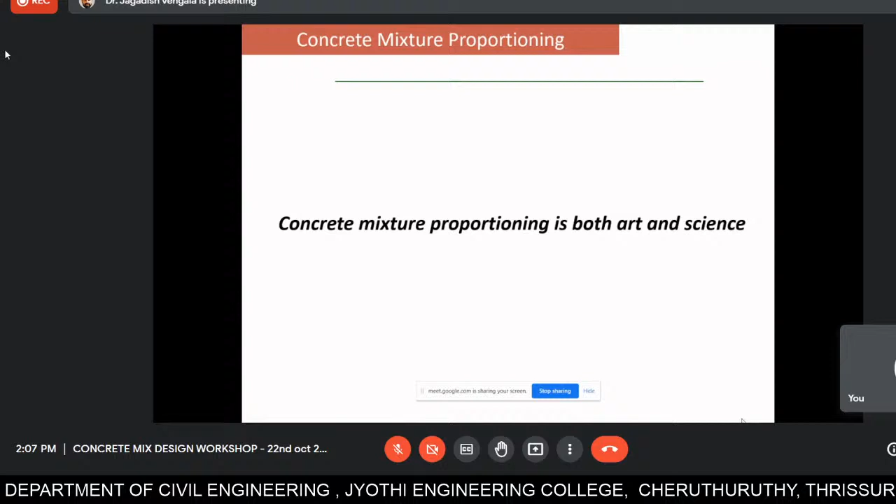So when you talk about concrete mix design or mix proportioning, it is both art and science. Why I'm saying this? Because you are mixing different constituents, and the properties of these materials, whatever you are mixing, whether you take cement, coarse aggregate, fine aggregate, water, or any other admixture, whether it is chemical or mineral, each material has a different property. So to mix them and make them into one strong construction material requires you to know a little bit of science, and it is also a kind of art.

So before getting into the topic, why is mix design required for normal concrete? Because many times we might have seen in our places, particularly in small residential buildings... I want you to see this particular video.

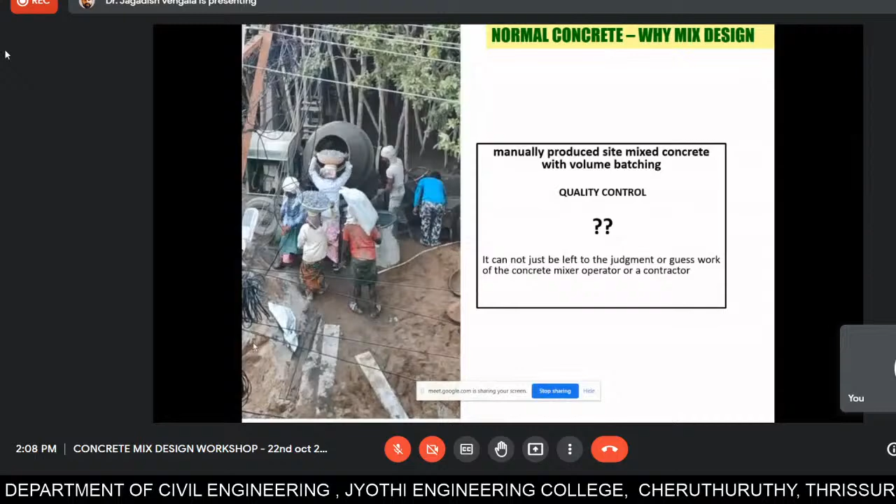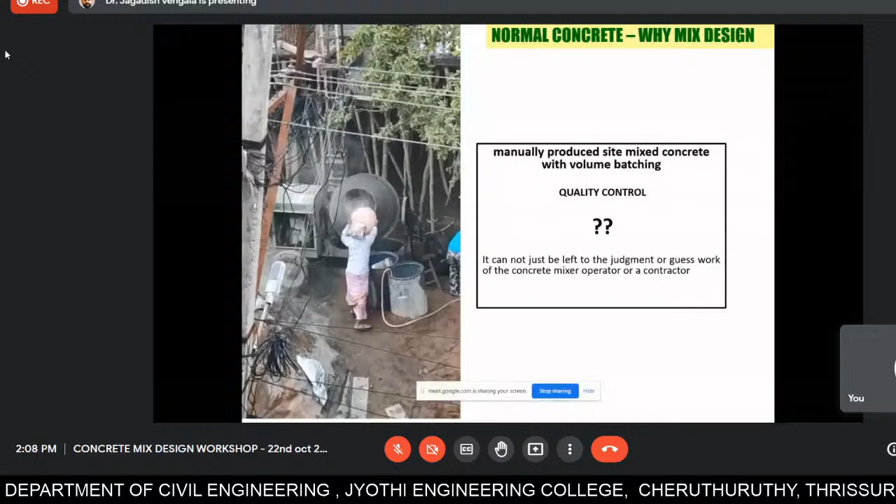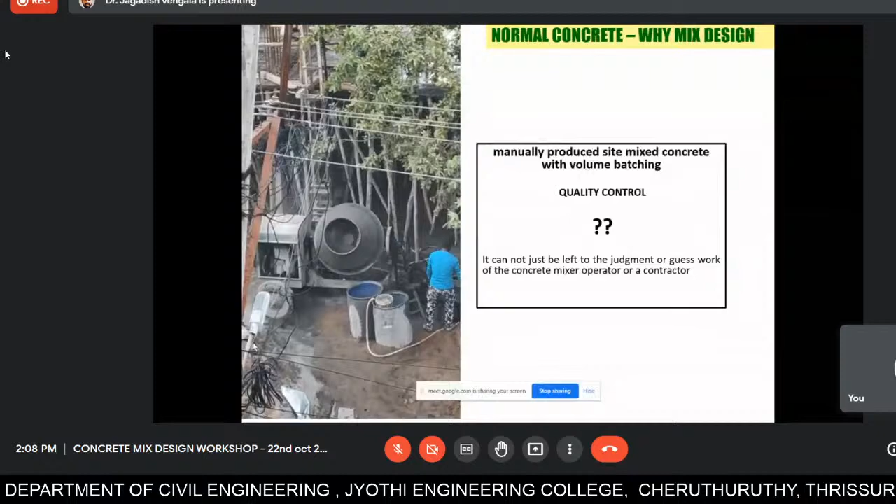Typically the mixer operator decides how much quantity of coarse aggregate, fine aggregate, and water has to be mixed. And once it got mixed, he decides - without proper mixing, sometimes he may put that concrete mix for dumping into the site. You can see, I just wanted to carefully show this now.

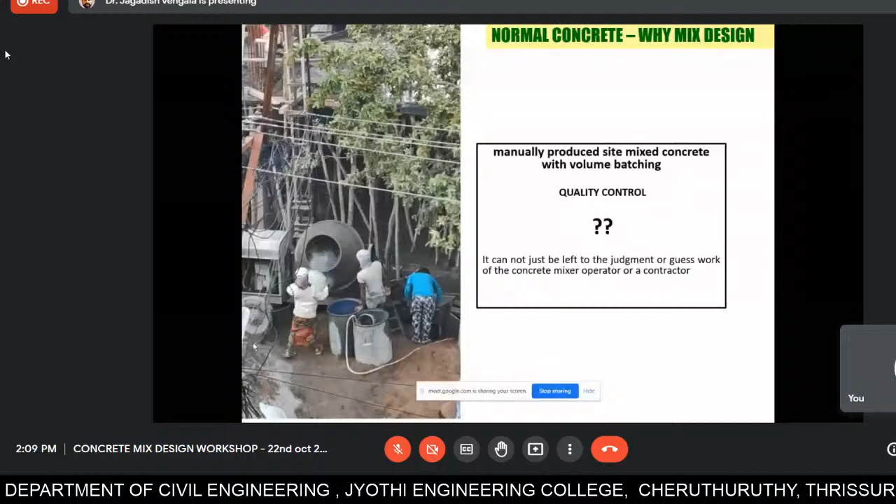The mixer is getting rotated, and she has put the coarse aggregate, and immediately after she put the coarse aggregate, without properly getting mixed, is placing the concrete. The same concrete is being dumped on one of these slab portions of a particular house.

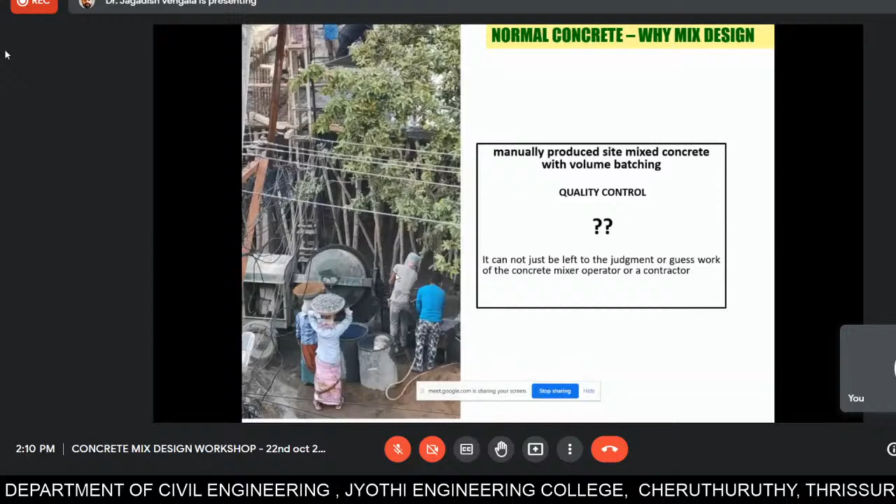So what I mean to say is, in so many sites, concrete is getting abused without having a proper mix design. And also many times they are based on volume batching. So quality control of the concrete is definitely a question mark all the time. You cannot leave it to the judgment or guesswork of the concrete mixer operator or a contractor. From the video, you can clearly see how the concrete is getting abused without having a proper mix design, and it is getting placed in one of the elements of the house.

So it is a little bit complicated because any variable changes, whether it is coarse aggregate, fine aggregate, cement or water, the entire properties of the concrete may be adversely affected. It will change. It will affect the concrete mix design.

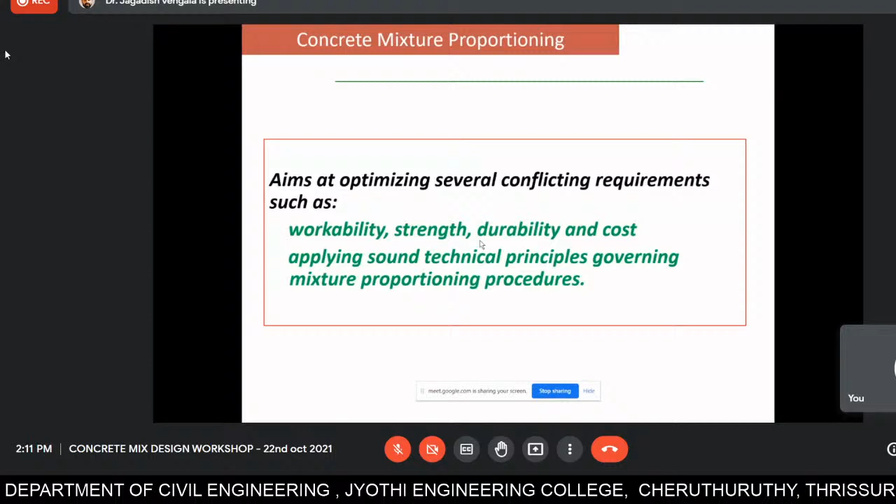The aim of the concrete mix design or mixture proportioning - you need to understand four very important parameters. One is workability: when the concrete is in fresh state, you can place it properly, transport it properly. And at the end of the curing period, it has to achieve the strength. Also the concrete what you placed, it should be durable in nature after 3 years, 4 years, 10 years, 20 years. And also at the same time, the mix, whatever you are preparing, it should be economical in nature. So based on these four very important requirements, you prepare the concrete mix.

But when we look into the traditional concrete mix design method, that means volumetric batching, what we saw earlier - they used to say like 1, 2, 4 or 1, 3, 6. So 1 is cement, 2 is sand, and 4 is gravel proportions. Typically what we mix these materials is volume by volume, and water content we add based on whatever the workability requirement is. So this is more of a volume batching, and the quality of the concrete is a question mark.

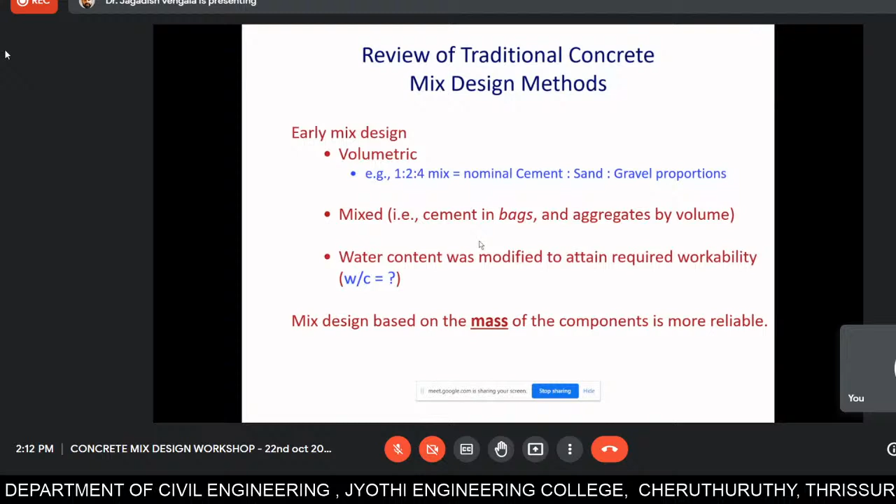But when you are designing the mix based on the mass of the components, it is more reliable in nature. I just wanted to give you an example here based on weight versus volume batching observations. When you look into the mixed proportions, suppose you take 1, 1.5, 3 or 1, 2, 4 or 1, 3, 6 - the weight equivalents, if you calculate, you can see the coarse to fine aggregate ratio in case of 1, 1.5, 3 is 2 in case of volume and 1.663 in case of the weight equivalent. So when you compare these mixes, both in terms of weight and volume, and compare the strength, you can see the weight batched mixes give more strength compared to volume batching.

This is one of the studies conducted by Joshua et al. So what I mean to say is, you have to go for weight batching rather than volume batching. Very, very important point.

Some of the principal factors, as I've discussed earlier - the first is workability. After preparation of the concrete, it has to be transported properly without affecting the properties, and it has to be placed in position, either by pumping or by placing, dumping. Also, it has to ease with the compaction when you are using compacting equipment. So we generally measure the workability in terms of slump.

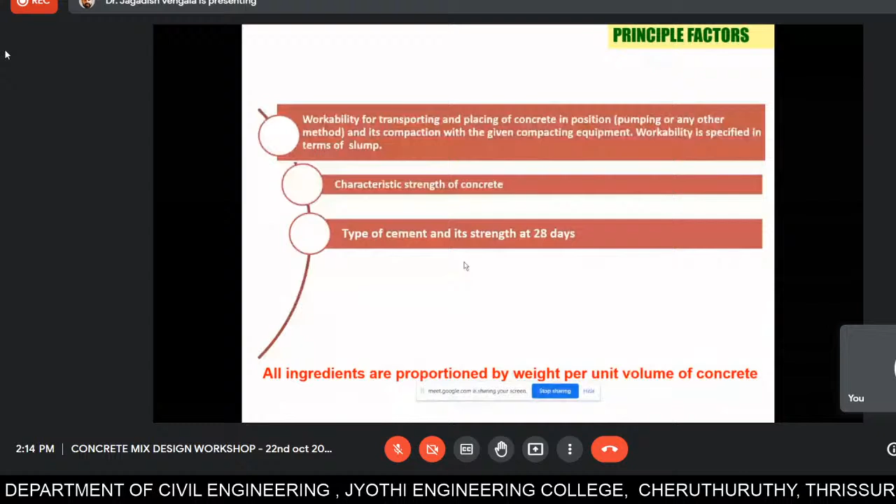Next is the strength of the concrete, what we call characteristic strength of the concrete. Also, one of the factors that affects the mix design is the type of cement you're using and its strength at 28 days. Many times at sites, they'll be having about 53 grade, and sometimes Portland Pozzolana Cement (PPC), and Portland slag cements. So you have to be very careful about what type of cement you are using and its strength. You have to test the basic properties of the cement you're using at the site.

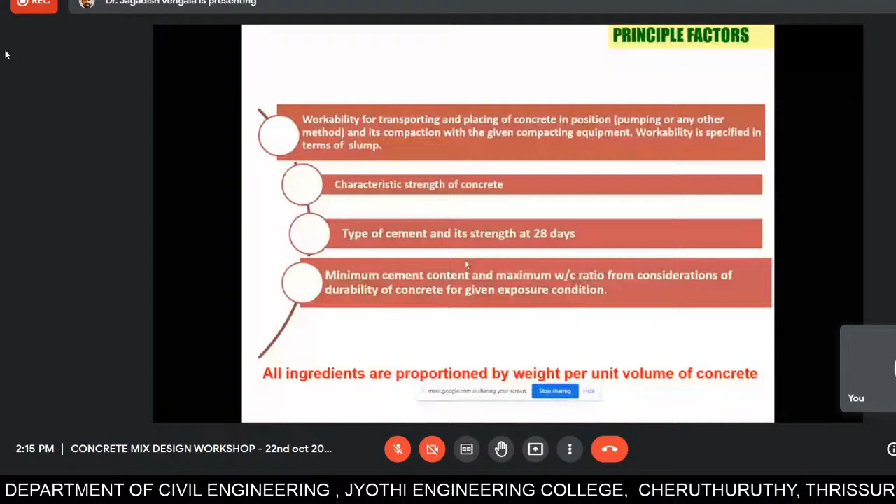Two more important considerations one has to look into are the minimum cement content and the maximum water cement ratio. When we talk about durability considerations or exposure conditions, these two parameters are very important. So we decide the mix design and grade of concrete based on the exposure condition.

Many people think in reverse. Suppose you take M30 grade concrete, they think the cement content is this much, the maximum water cement ratio is that much for columns or beams. But generally you have to consider the exposure condition of the element. So based on the exposure condition, we design the concrete mix, whether it is M20, M30 or M40. Very important point here.

Aggregate properties affect a lot. Is it a graded aggregate? Is it a rounded aggregate? The shape and size - is it 20mm down, 12mm down, or 10mm down? Is the surface texture rough or smooth? These are the factors which will affect the concrete mix proportions. And all the ingredients are measured by weight per unit volume of concrete.

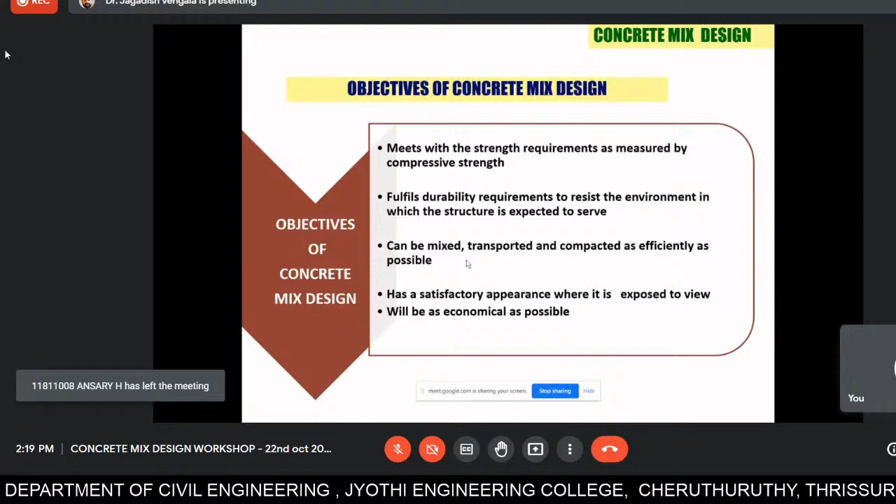Suppose you have to pump the concrete to the 11th or 12th floor using concrete pumps. You have to make the concrete such that it can be pumped from the ground floor up. Next, at the end of placing, it has to give a satisfactory appearance - the view should be proper - and it should be as economical as possible. These are the objectives of concrete mix design.

So what is the process of concrete mix design? Based on past experience, published data, or information obtained from the properties of aggregates, we design the initial mix. Based on that initial mix, we then do trial mixes in the laboratory and test them.

I worked at Torsteel Research Foundation in India from 2002 to 2004, and during that time I designed more than 2,000 concrete mixes - 2,000 trials we did. Once you do the trial mixes in the laboratory and test them, before starting the project small modifications can be done at the site. That's why they do full-scale trials before construction begins. Any changes needed due to material variation get tuned to site requirements. So this is how the process of concrete mix design happens, from theory to practice - these are the three stages.

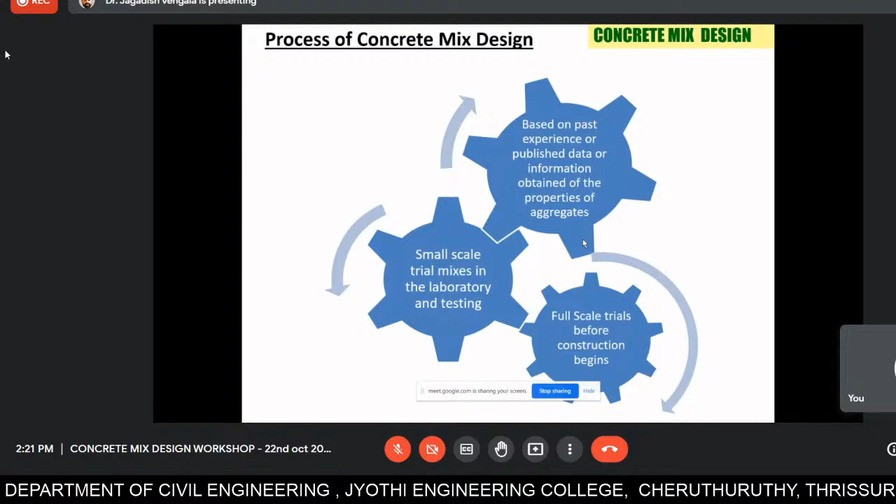As I mentioned very clearly, we design the mix based on the exposure condition, the first and foremost point. Suppose you are in a coastal region, whether it is Mangalore, Machilipatnam, or Mumbai, the coastal exposure condition is either severe or very severe. It depends on the element also. So for coastal, the exposure condition is say severe, then you are going for the reinforced concrete structure.

For severe exposure condition, the minimum grade of concrete you have to go for is M30. When going for M30 grade concrete, the minimum cement content you have to use is 320 kg per cubic meter, and the maximum water cement ratio you have to limit is 0.45 for the severe exposure condition.

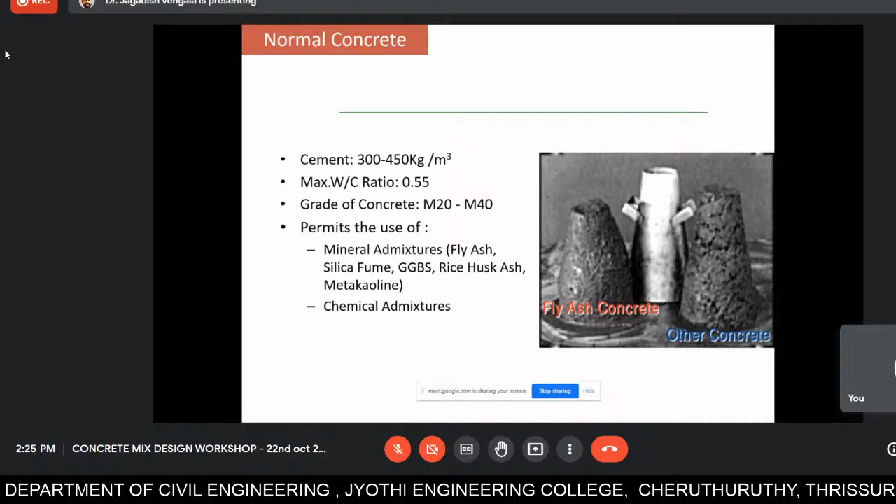The most commonly used mineral admixtures nowadays at site are fly ash and GGBS. In some important cases, to get early strength, people are using silica fume or other mineral admixture materials.

So here you need to understand what is the role of the chemical admixture. When you take a normal particular mix having 0.55 as water cement ratio and slump as 75 mm, the strength is 51 MPa.

Suppose if you wanted to increase the slump by adding plasticizer, you can increase the slump without affecting the strength by adding plasticizer.

Another advantage of adding plasticizer is, without increasing the slump, by maintaining the slump and reducing the water cement ratio, you can increase the strength of the concrete from 51 to 63 MPa. So in one case, we maintained the 75 mm slump, but reduced the water cement ratio from 0.55 to 0.44. So using plasticizer or chemical admixture, particularly plasticizer, water reducing admixture, you can either increase the slump or increase the strength.

Based on the flow table spread, to determine the amount of water in concrete to make very high strength concrete, the amount of water we go for is like 160 to 140 and so on. This is without superplasticizer, up to 160. With superplasticizer, you can come down to 140, 135. If you want to make flowing concrete, without superplasticizer you can go up to 240, and with superplasticizer you can reduce it to 200, 220.

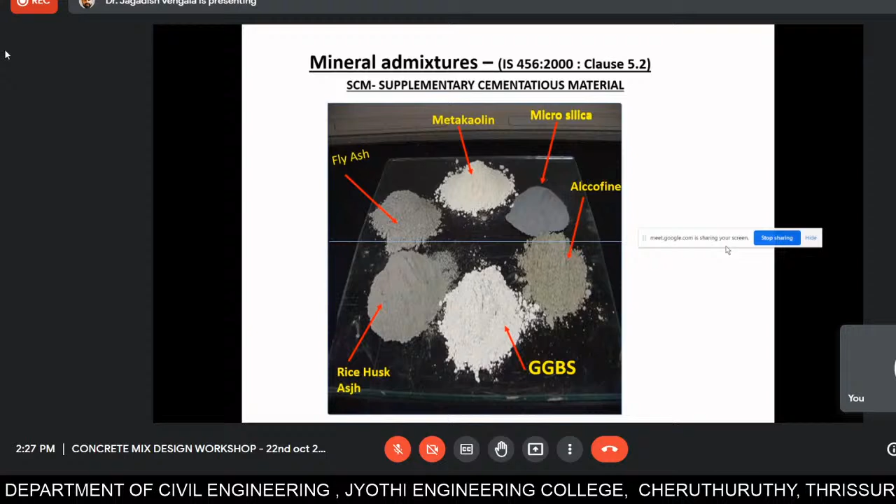Why do we have to use mineral admixtures? What are the advantages? Before getting into the example of the concrete mix design, I would like to give you a small overview of the basic reaction when you add water to the concrete, or when you add water to the cement or the mixture.

OPC, ordinary Portland cement, is the binding material. It reacts with water and the hydration process starts. The final end product is calcium silicate hydrate, CSH gel, along with calcium hydroxide or excess lime that is formed in the concrete.

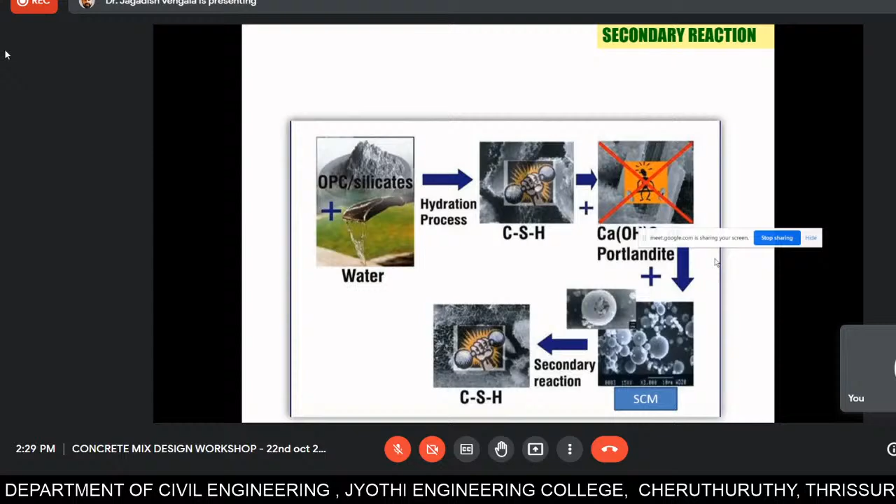When you add any of these supplementary cementitious materials or mineral admixtures, whether it is fly ash, silica fume, or GGBS, the excess lime present in the concrete, that is calcium hydroxide, reacts with this supplementary cementitious material. This is called a secondary reaction, and it forms more CSH gels. So the excess lime present in normal concrete, when you add the mineral admixture, produces more CSH gels, resulting in stronger concrete.

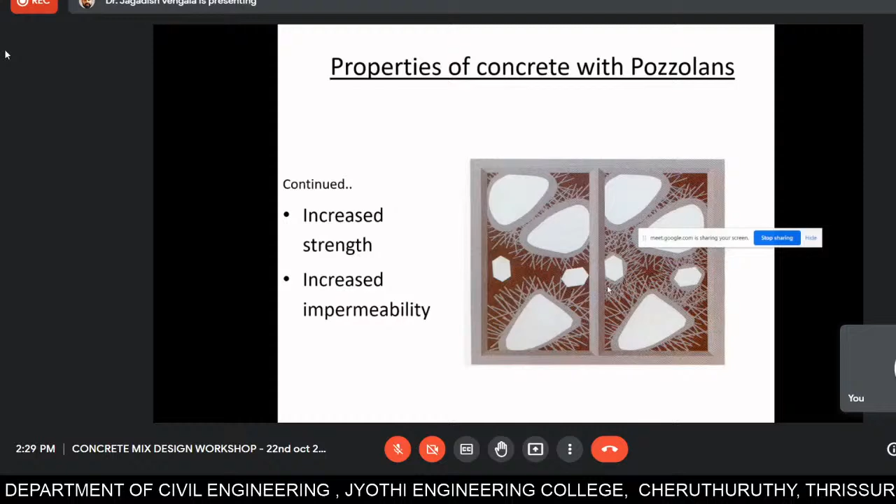So what are the properties of concrete with these pozzolans? It will increase the strength and increase the impermeability. Why? Because you have more CSH gels that form in the concrete, which reduces the voids. So it increases the strength and at the same time increases the impermeability. It is not permeable because more of the voids get filled with these CSH gels. Also, the compressive and tensile strength will increase because of the lack of bleed pockets or fewer voids, wherein dense hydrated cement paste with more CSH gels gets formed within the concrete. That is why your compressive and tensile strength will also increase.

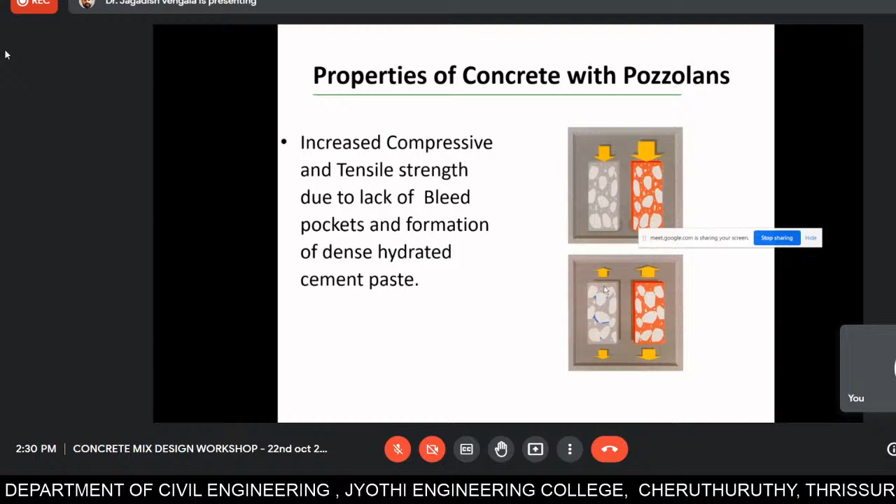Coming to the properties of the aggregates, many times for bigger projects, the project in-charge or the project manager goes to the site and selects crushers and selects the aggregates, which type of aggregate they want. They avoid flaky or elongated coarse aggregates.

Based on our observation, it is very evident that when you compare jaw crusher aggregates to VSI, vertical shaft impact crushers, you will get more uniform aggregates compared to the jaw crusher aggregates. So you have to make sure it is either square or angular in nature. You have to avoid flaky or elongated aggregates in your concrete mix.

It is very important to combine different aggregates to make sure you get a graded aggregate. So the basic mix design principle is to have less voids in the concrete. If you have different sizes of aggregates within the concrete at different size fractions, fewer voids will get formed. That is why, when going for coarse aggregates as per IS 383, it is very important not to go for single sized aggregate. If you find 20 mm down is a single sized aggregate, you mix 10 mm down aggregates to make it graded, and make sure you use a graded aggregate in your concrete mix. These are the limits given by IS 383. One has to make sure you got a graded aggregate or not before using it in concrete.

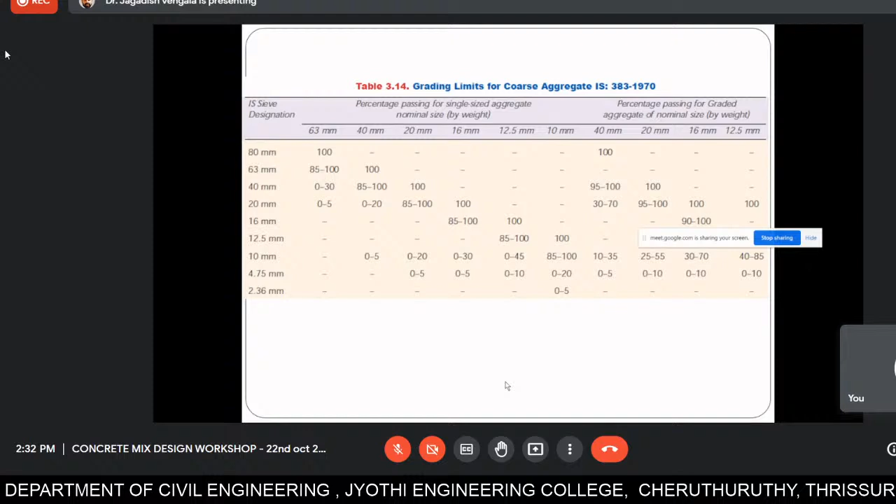Coming to the condition of the aggregates, the moisture. Moisture is a very, very important parameter. If continuous rains are there, if the aggregates got wet and completely submerged in water for quite a number of days, 2 to 3 days, it is completely saturated and the surface is wet. So we call it saturated surface wet.

Suppose if you make the outer surface dry, but the aggregates are saturated, we call it saturated surface dry. For mix design purposes, it is very important to note that we consider SSD condition. Many times people say SSD condition. What is SSD condition? We always consider the aggregates to be in saturated surface dry condition. That is why we make corrections for both moisture correction and water absorption correction because of the very basic nature of SSD condition. We take it for calculating the concrete mix.

Air dry is outside dry, and only the surface periphery gets dry; the inside still has a little moisture. Oven dry is called bone dry; we do not include water needed for absorption. So these are the four types of conditions we consider for aggregate moisture. But when designing the concrete mix, we take SSD condition while calculating the concrete mixes.

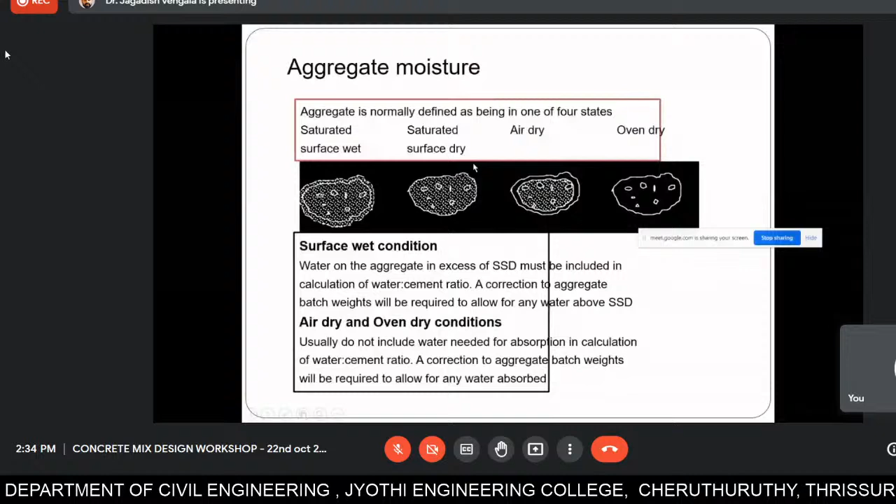This is what I am talking about, the lowest void content principle. You have the gravel with you and you have the sand with you. There is a very interesting test one can do to determine the least void content, to find the aggregate skeleton that gives the least void content.

You take a 5-liter container as per ASTM C29, which is usually used to determine the dry density of aggregate. We actually determine the loose density of aggregates and the rodded density of aggregates.

So you have to take different mixes because 60-40 is the most common, like 60 is your coarse aggregate and 40 is your sand. Depending upon the zone size, you change that ratio. So different sand to gravel ratios you can take, and you can find the density of the various proportions, and find the lowest void content practically using this method, and adopt that in your concrete mix design. Suppose if you are using a new material, or don't have much data, or are interested, you can go for this lowest void content method.

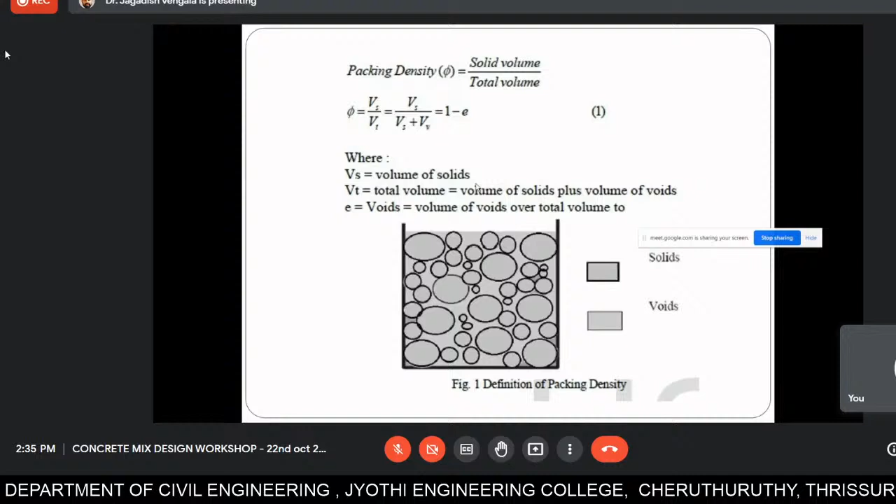So let me explain the concrete mix design as per IS 10262. Earlier it was 2009, and now it is 2019, the new concrete mix guidelines. Both are the same. I will explain how exactly you design the mix.

So some of the highlights of IS 10262 2019 are, it is divided into 3 different grades. One is the ordinary grade, like M10 to M20. Standard grades are M25 to 55. And high strength is between M60 to M100. These 3 types of grades of concrete you can design using IS 10262 2019.

Some of the other highlights are, they have given general guidelines, and ordinary and standard grades separately, and high strength concrete separately, and also 2 more special concretes. One is self-compacting concrete, and another is mass concrete. So this is the information given in IS 10262 2019.

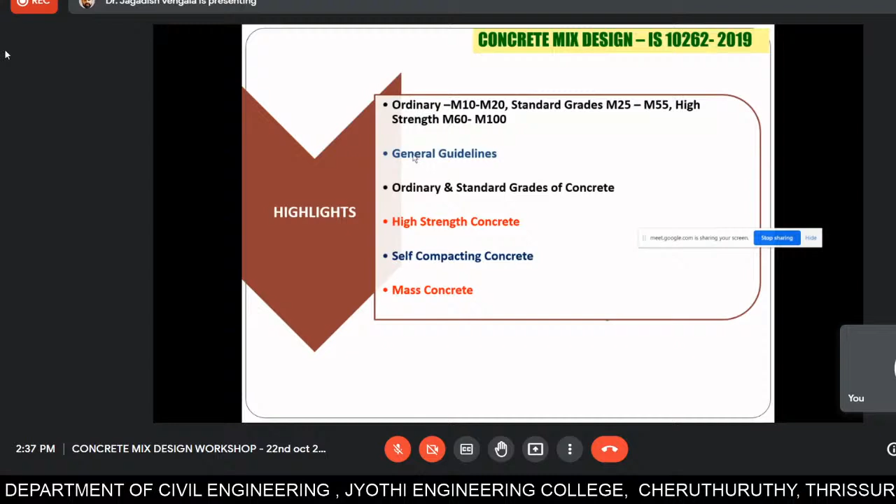And workability criteria, one has to understand. So what is the slump you are aiming at, as per IS 456 table 7? Particularly we go for 0 slump, but to differentiate we measure the compaction factor test for 0 slump. Usually 0.75 to 0.8 compaction factor you achieve for pavement concrete or whatever. This is a very low degree of workability.

And for mass concrete, canal linings, and other beams, walls, or lightly reinforced sections, we go for the low degree of workability, wherein the slump is between 25 to 75. Heavily reinforced sections need medium workability, between 50 to 100, and pumped concrete is also medium, between 75 to 100. Trench fill, in-situ piling works and all require high workability, between 100 to 150, and tremie concrete, where you just pour the concrete, requires very high workability, between 150 to 200.

We're talking about the vertical slump, but nowadays people are talking about self-compacting concrete, and horizontal slump is what we are talking about there. Nowadays people measure the horizontal slump for self-compacting concrete, which varies between 500 to 800 mm in spread.

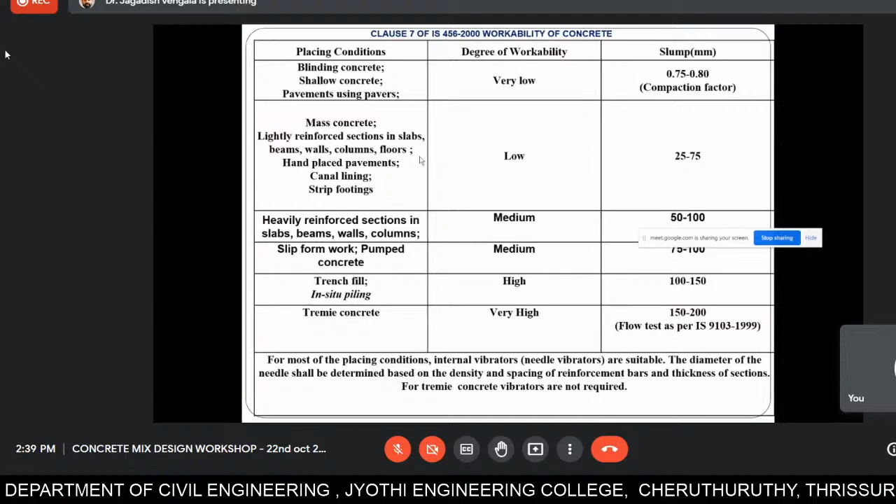As you have seen in the video, mixing time should be a minimum of 2 minutes. You have to make sure the concrete is consistent, the mix is consistent, and all the mix constituents are properly mixed. And workability has to be checked at frequent intervals. This is very important.

And placing of materials also makes a difference, particularly when making fiber reinforced concrete. You have to place 50% of the coarse aggregate, then put 20% of your fibers, then 50% of sand, again 20% of fibers. So there is a specific way of mixing. Then you put, rotate, and then put, rotate again. So particularly for fiber reinforced concrete, if you need the fibers spread uniformly, the mixing sequence should be different.

So you can see the difference between fully compacted, whether by vibration or hand compaction, versus insufficiently compacted concrete. When the water cement ratio increases, the strength reduces, right? Suppose even if you keep the water cement ratio constant, but you're not compacting properly—so when the water cement ratio reduces, you have to compact more. Very important.

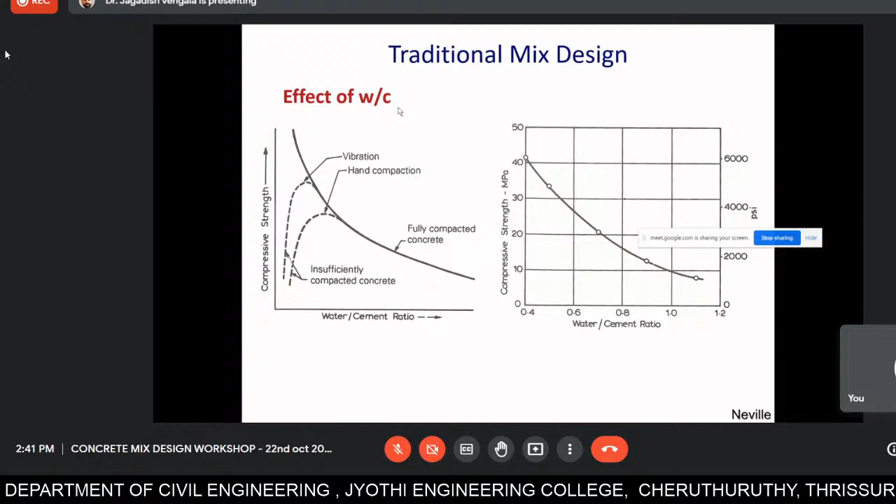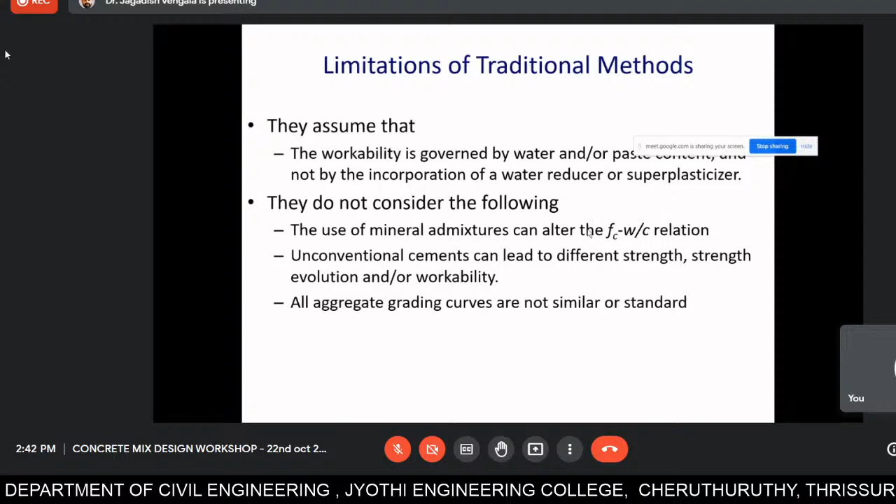The traditional methods, as I've mentioned earlier, have limitations in traditional mix design. For workability, they only talk about water-paste content, not superplasticizer or other admixtures. They don't consider mineral admixtures and unconventional cements, particularly PPC and PSC, nor aggregate grading curves. These are some of the limitations, which is why you have to go for the method of mix design.

Let me take an example with fly ash as admixture as per IS 10262. The details are: grade M40, type of cement 43, mineral admixture fly ash as per IS 3812, maximum aggregate size 20 mm, minimum cement content 320, maximum water cement ratio 0.45, and workability requirement 120 mm slump.

Exposure condition is severe, which is why we limit the maximum water cement ratio to 0.45 and the minimum cement content to 320. So the entire mix design comes from the exposure condition. The base is exposure condition, and based on that we go further in designing the mix. We are designing M40, however the minimum grade of concrete is M30, but in this case we are designing M40.

They want to pump the concrete and the degree of supervision is good. They're using crushed angular aggregates, and anyway the maximum cement content limit for any case is 450 kg per cubic meter. Superplasticizer is also being used for this particular mix. This is the mix details given.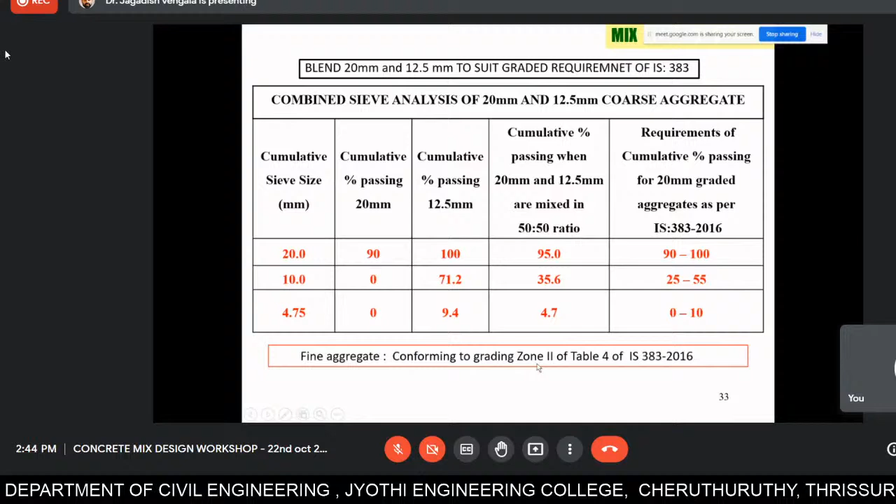So the first thing we have to do is find out the target strength. The target strength formula is F-CK equals characteristic strength plus 1.65 times the standard deviation, or otherwise you can take the X factor based on the grade of concrete. This is what is given in IS 10262:2019.

Standard deviation: you can consider 3.5 for standard M10 and M15. But for RCC, the minimum grade of concrete we go for is M20. So for standard concrete M20 and M25, go for 4 as the standard deviation, and for M30 to M60, you go for 5 as the standard deviation, and for 65 and above up to 80, 6 is the standard deviation. Or otherwise you can add the X value—either 5.5, 6.5, or 8—as the additional strength.

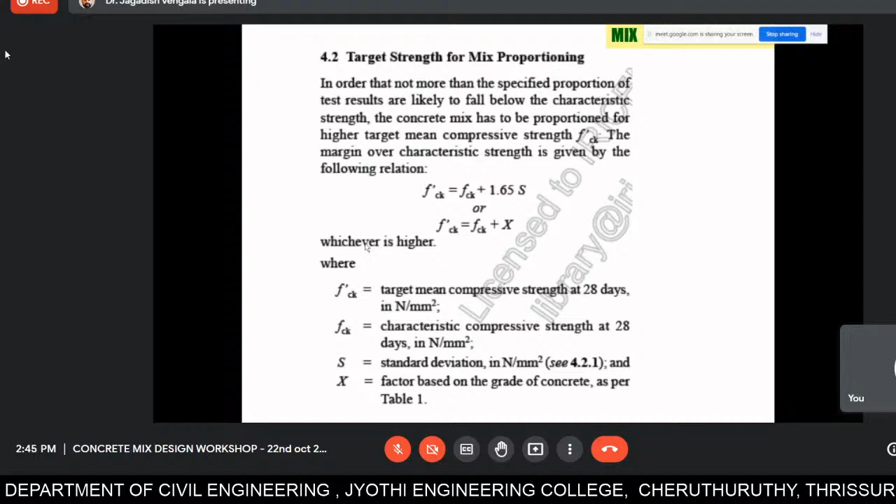So if it is M40 grade of concrete, it's 40 plus 6.5 in case of using the X value, or otherwise 40 plus 1.65 times the standard deviation. That's what I have given here: F-CK plus 1.65 times the standard deviation. Our standard deviation here for M40 grade of concrete is five, so 40 plus 1.65 times five equals 48.25, which is your target strength.

So you got the target strength as 48.25. You have designed the concrete—you have to design the concrete for 48.25 MPa.

So the new IS 10262:2019 goes back to the standard curves between water cement ratio and compressive strength. Earlier, before 2009, we were using the same curves. The improved curves are given here—the water cement ratio to compressive strength curves.

So for 48.3 MPa, if you can see, for OPC 43 grade—they have given curves for 33, 43 and 53, and here in our case it is 43—for 48.3, if you go straight and find out, this is the second line. At 48.3, when you go here, it comes around 0.36 for OPC 43. So 0.36 is good enough.

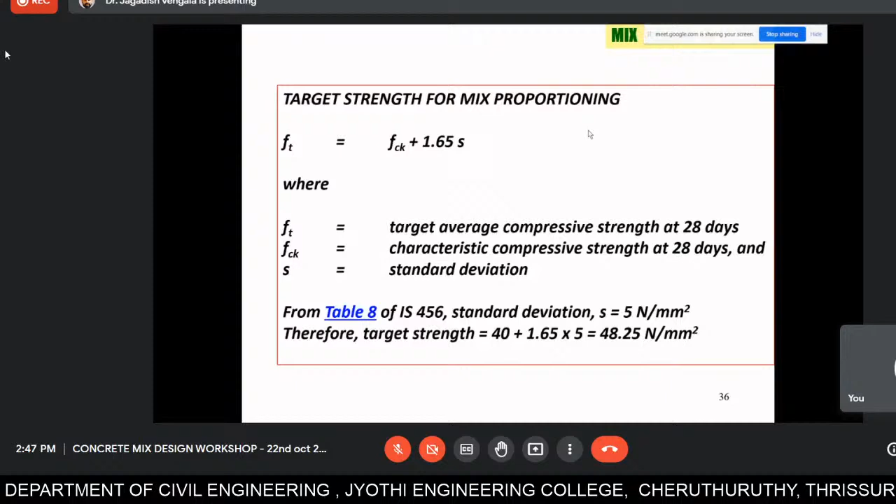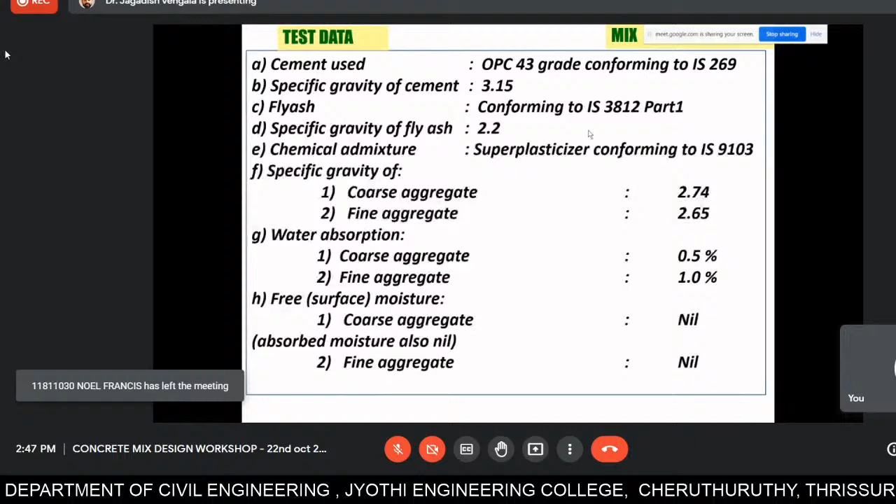You can adopt it because it is less than 0.45, the maximum water cement ratio limit for the exposure condition we saw earlier, since it is a severe condition. So 0.45 is the limit, and 0.36 is not at all a problem. We have taken it from the curve based on the strength we obtained from the target mean strength, which we have done here, right?

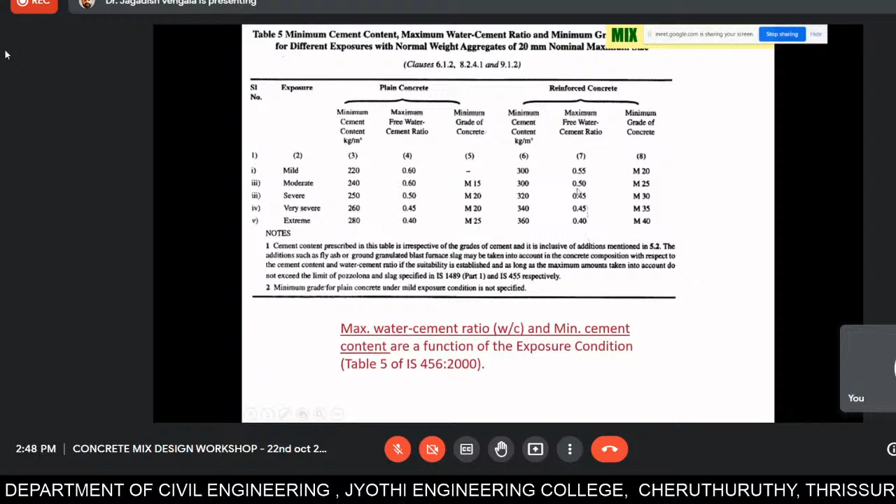You can see here, M40 - sorry, exposure condition we have to look into it. Severe condition, the exposure condition is 0.45. This is where people get confused. We are designing M40, but don't think that for M40 the maximum water cement ratio is 0.4. No, it is based on the exposure condition. Severe condition's minimum grade is M30, but we are designing M40 grade for severe condition. That's why the maximum free water cement ratio is 0.45.

Let us see what are the various types of exposure conditions: mild, moderate, severe, very severe, and extreme. These are the 5 exposure conditions. As I mentioned, concrete surfaces in contact with or buried under non-aggressive soil comes under moderate condition. That's why footings we design based on the moderate exposure condition. Severe condition is concrete completely immersed in seawater or exposed to coastal environment - coastal environment generally comes under severe condition. You can see other different types of exposure conditions. Accordingly, you have to take these exposure conditions and limit the maximum water cement ratio.

So let us go back to our case. Next is selection of water content, based on Table 2 of IS 10262. There are 3 types of aggregates we use for normal concreting: 20 mm, 10 mm, and 40 mm. 40 mm generally we go for road works or other special cases. Typically we go for 20 mm down aggregates. For 20 mm down aggregates, the maximum water content we have to take is 186 liters. So for 20 mm, we have considered 186 liters.

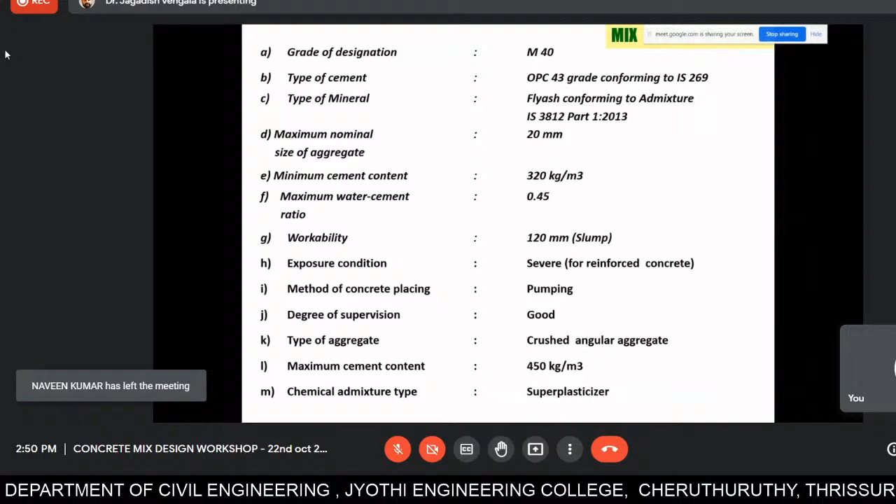So for 120 mm slump, you can see the corrections given here. For every slump increase of 25 mm, you add 3% correction in water. So 186 liters is your water. For 25 mm, suppose ours is 125 mm: up to 50, 186; at 75, 3%; at 100, 6%; at 125, 9%. So 9% additional water correction we have to take.

There are other conditions - if it is crushed angular aggregate, no need to take any correction. If it is rounded gravel, then you have to reduce the water by 25 kg. Suppose you are using water reducing admixture, you can reduce up to 5 to 10% of water. It depends on the admixture type.

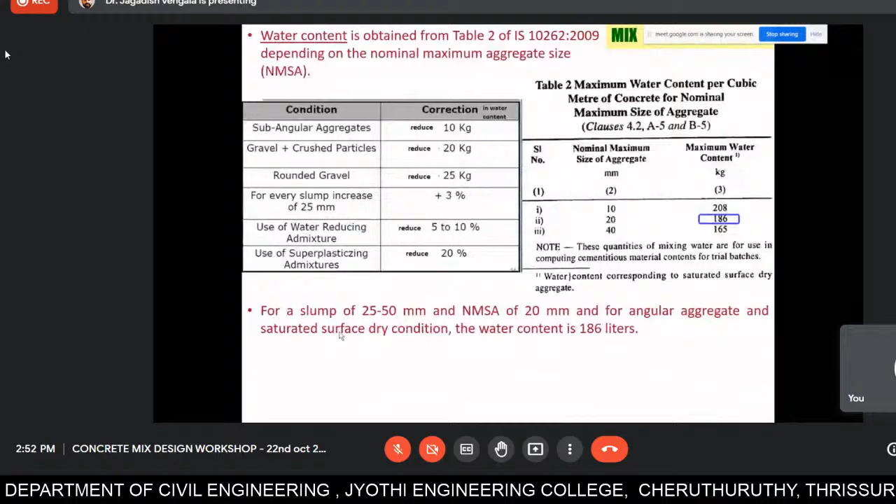So the water is 200 liters for 120 mm slump. As we are using the superplasticizer, it can be reduced up to 23%, because based on the trials of the superplasticizer, it was found that this water reduction can be achieved. So 100 minus 23% is 0.77, meaning 77% of 201 liters is 155 liters of water you can add, because we are using the superplasticizer.

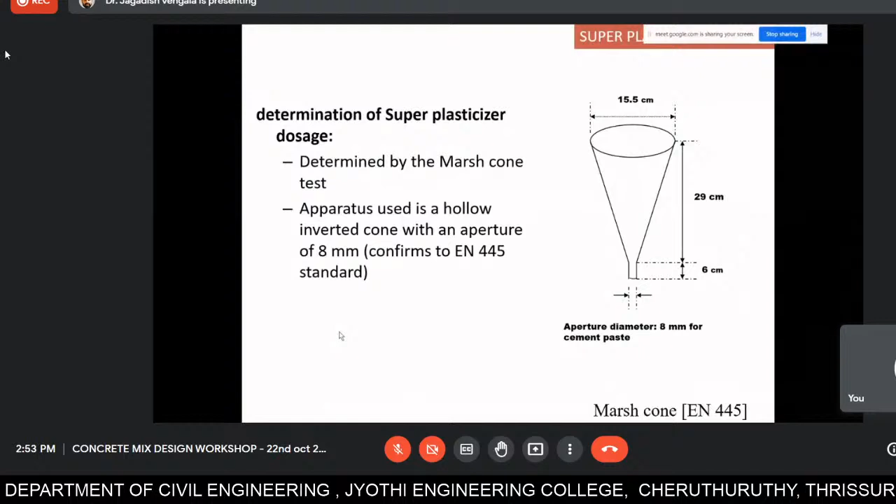So how do we find the superplasticizer dosage? The very important and famous test we have is called the Marsh Cone test. It's an inverted cone with an aperture of 8 mm, wherein you find the optimum dosage of superplasticizer. This is the typical Marsh cone. Here we find the flow time, the viscosity of the fluid. We fill it with the paste, and then measure the time taken for 500 ml of paste to flow out of the bottom aperture.

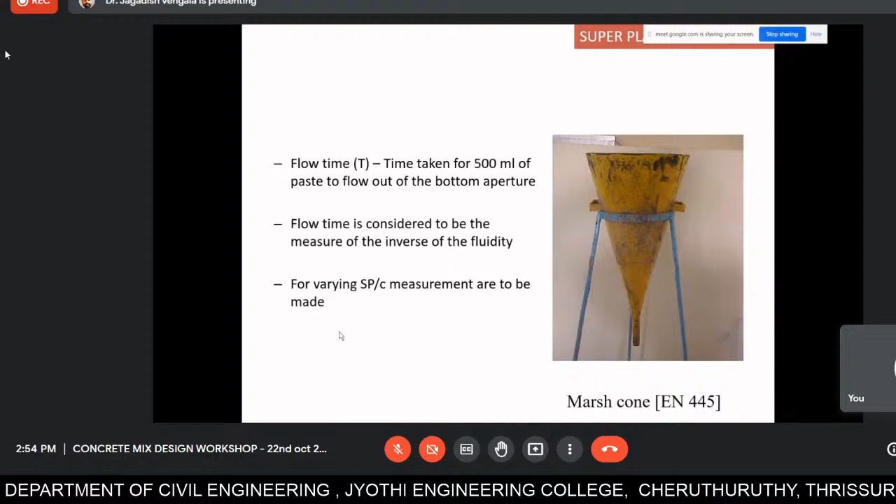Then we measure the superplasticizer dosage versus the flow time, varying the superplasticizer dosages and measuring the flow time. After keeping on adding, say 0.2%, 0.3, 0.4, 0.5 - at a certain point you can see the flow time is not increasing anymore. This is the optimum dosage, what we call the saturation point. People say it exhibits at around 140 plus or minus 10 degrees. Based on extensive experimental study, exactly at that point you get the optimum dosage of superplasticizer. So these are the typical trials we have done.

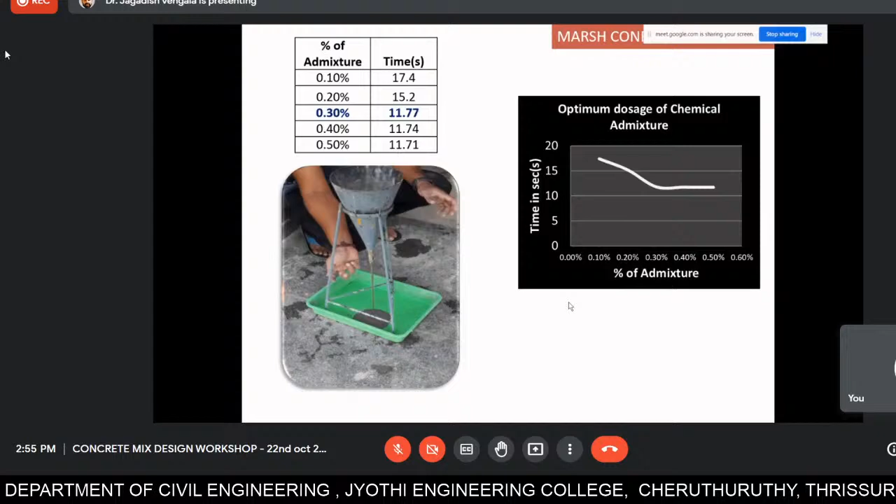So for 0.1% of superplasticizer, we got 17 seconds. At 0.2 it is 15 seconds. At 0.3 it is 11 seconds. And after 0.3, even if you use 0.4 or 0.5, it is unchanged, showing 11.7 only. That means the saturation of superplasticizer is achieved. So this is how you find out the optimum dosage of a chemical admixture or superplasticizer based on the Marsh cone test.

Okay, let us get back to the calculation part. So we have found the water cement ratio is 0.36, and then based on the water cement ratio of 0.36 and water content 155 liters, we just found this.

So we can measure the cement content, right? Water to cement is equal to 0.36, and your cement you can find out by water cement ratio. So 155 by 0.36, we get around 431 kg per cubic meter.

So once you get this cement content, you have to do two checks. One is whether minimum and maximum cement content requirement is satisfied. For severe condition, the minimum cement content is 320, and maximum is 450, it should not be more than 450. So it is more than 320 and less than 450, so your cement content is fine.

But as per durability criteria, you have to do adjustments for minimum cement content. What does that mean? For 10 mm, suppose if you are taking the 10 mm coarse aggregates in place of 20 mm, you have to additionally add 40 kg per cubic meter. That means your minimum cement content requirement is not 320, it is 360 kg per cubic meter, if you are using maximum size of aggregate as 10 mm. I just wanted to give you a hint here.

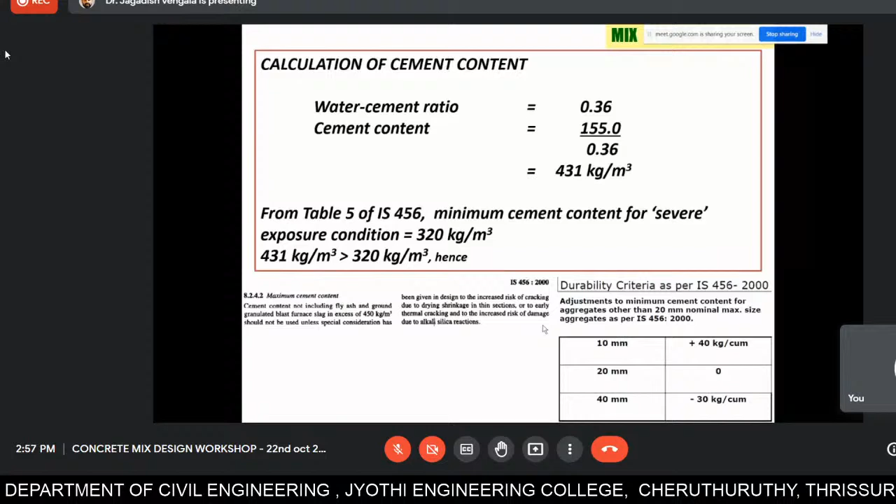Next is fly ash. Based on project, you can decide the percentage of fly ash. Sometimes based on experience and trial, you can increase even cementitious materials. So here we have increased the cementitious material content by 10%. 431 plus 10%, because we are adding the fly ash, is 474. So water content is 155. Again, you back calculate, that is 155 by 474, equals 0.327.

So we can take fly ash at 30% of cementitious material. Out of 474, 30% is 142 kgs. And reduce that 142 kgs from 474, which is 322 kg per cubic meter. So fly ash is 142 and your cement is 322.

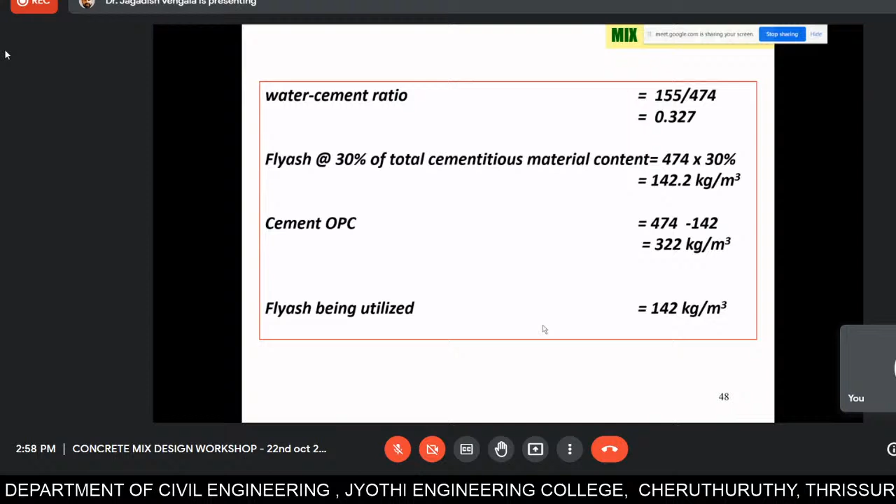So we got cement, water and fly ash. Now we have to find the coarse and fine aggregate ratios or the quantities. There is one more table between the water cement ratio and volume of coarse aggregate. It is very easy to remember. If it is zone 1, 20 mm aggregates, it is 0.6, and when the zone increases to zone 2, zone 3, zone 4, your 0.6 will become 0.62, 0.64, 0.66 with a 0.02 variation.

Similarly, for 10 mm down, it starts at 0.44 and increases, increasing your coarse aggregate. So when the zone of the fine aggregate is finer, your coarse aggregate content will be more, because zone 4 of fine aggregate is more finer in nature. Generally, we don't go for concreting with zone 4. We generally use zone 1, zone 2, zone 3 fine aggregate sand for the concreting purposes.

So here in our case, our coarse aggregate is 20 mm down, and zone 2 is our fine aggregate. So for zone 2, 20 mm, we have to take 0.62. The present water cement ratio is 0.327.

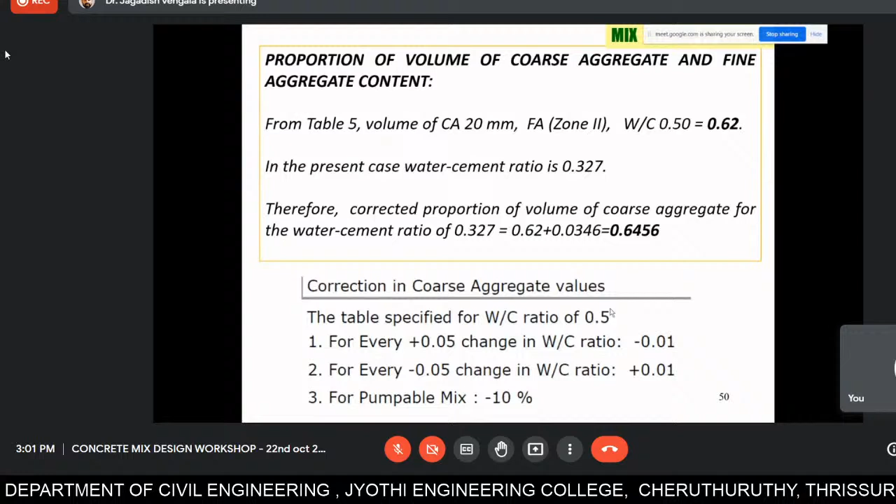But ours is a pumpable mix. Again, there is one more clause for correcting coarse aggregate. For pumpable mix, you have to reduce the coarse aggregate by 10%. So 0.64 will become 0.59 because you're reducing 10%. Because when you're pumping, too many aggregates should not be there because it gets blocked. That is why for pumpable concrete, they reduce coarse aggregate by 10%.

So once you get the coarse aggregate content is 0.59, then 1 minus 0.59 is the remaining, which is your fine aggregate, that is 0.41.

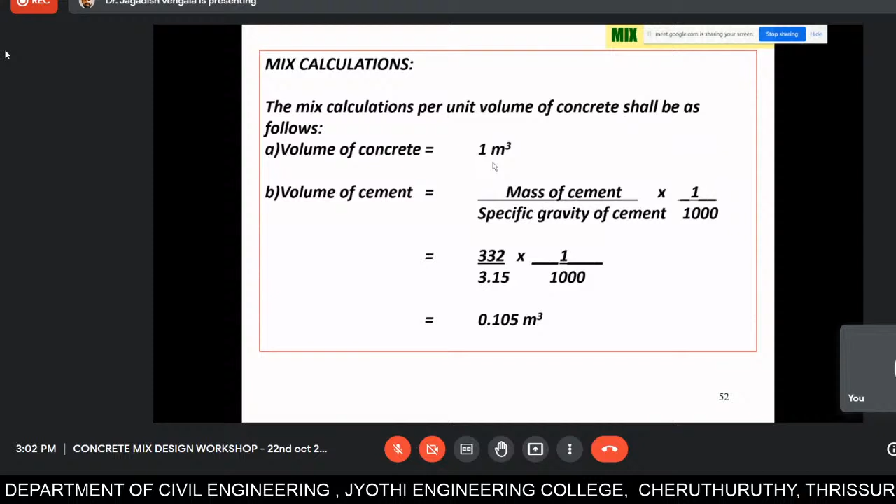So take the total concrete as 1 cubic meter, and mass by specific gravity into 1 by 1000 gives you the volume of cement, that is 0.105. In this case, 332 kgs by 3.15. Similarly, fly ash volume also we find, water volume also, and chemical admixture volume also you can find out. The volume of all-in aggregate is 1 minus cement minus water minus fly ash. This is around 0.66 cubic meter of volume as aggregate.

Entrapped air is 0.01 cubic meter. Generally for 20 mm aggregates, we consider entrapped air as 1%, so that is why we take it as 0.99. That's why here we have deducted 1 minus 0.901.

Now we find the mass of coarse aggregate: 0.6615 into the coarse aggregate value we found, 0.59, so 0.6615 into 0.59 into specific gravity of the coarse aggregate into 1000 gives the required mass. Similarly for fine aggregate, 0.6615 into 0.41 into specific gravity into 1000 gives the mass of fine aggregate.

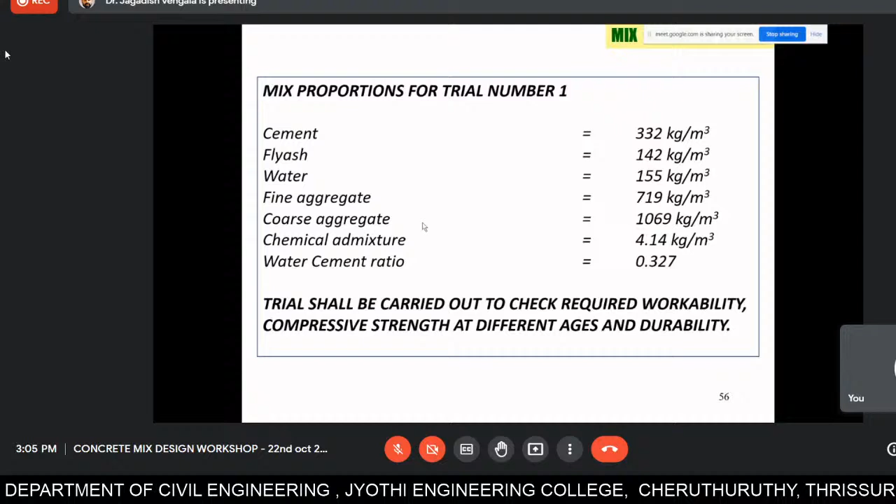So this is for high strength concretes. This is how you design normal concrete. When it comes to high strength concrete, you can see the volume of coarse aggregate for different zones of concrete. For high strength concrete, they don't use zone 4. Zone 1, if it is 20 mm, is 0.64, and zone 2 is 0.66, and so on.

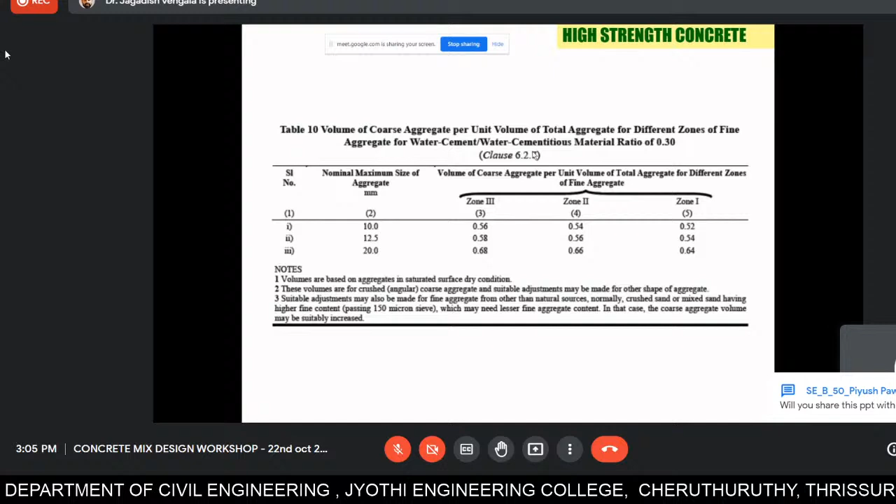The recommended water cement ratio, water to cementitious materials for high range water reducing admixtures, you can see here, for 100 MPa strength. If it is 20 mm down, you can go for 0.24 with high range water reducing admixture.

These are some guidelines they have given. In mix design, they are always guidelines, not something you have to exactly follow. As long as you achieve your workability and your strength, you can follow them.

This is the water content per cubic meter of concrete for high strength concretes. For 20 mm it is the same, 186 liters. For 12.5 it is 195, for 10 it is 200 kilos. This is given in the new code.

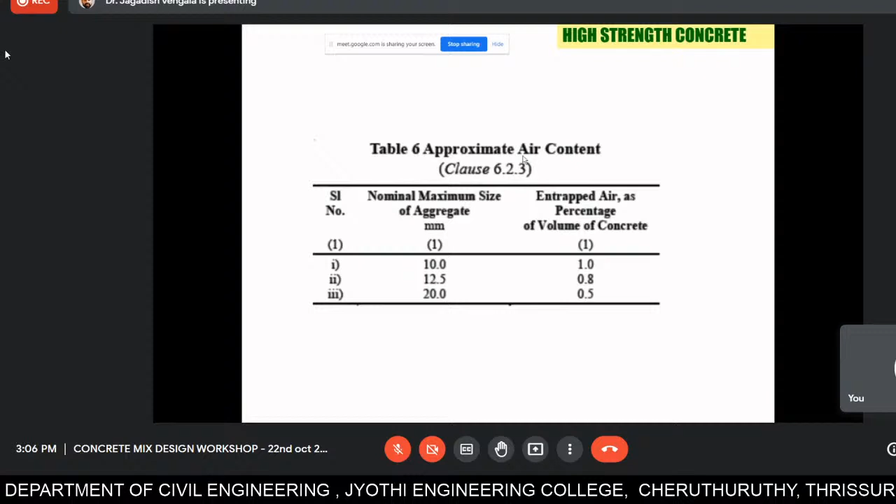Even the entrapped air, for 20 mm it is 1% earlier but now it is only 0.5%. For 12.5 it is 0.8, and for 10 it is 1%, that is allowed.

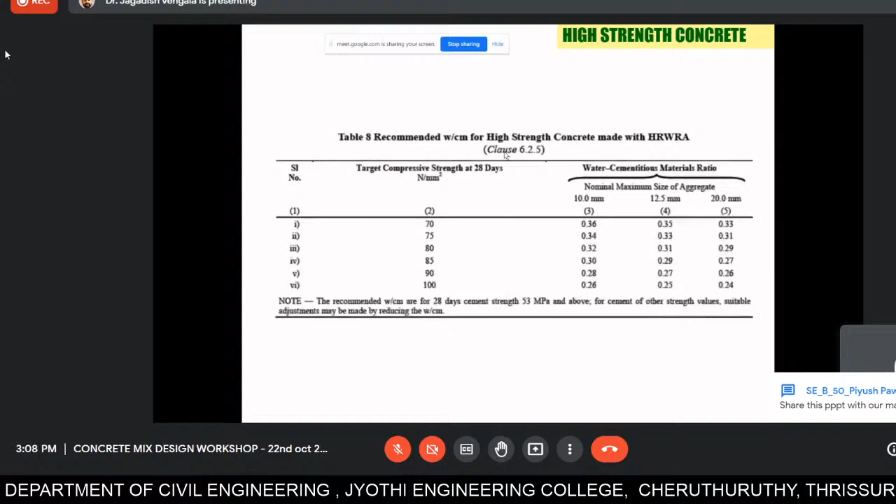Having seen this, you need to understand volume fractions of mix proportions. As you've seen in normal concrete, the volume of coarse aggregate, you can see here how much it is.

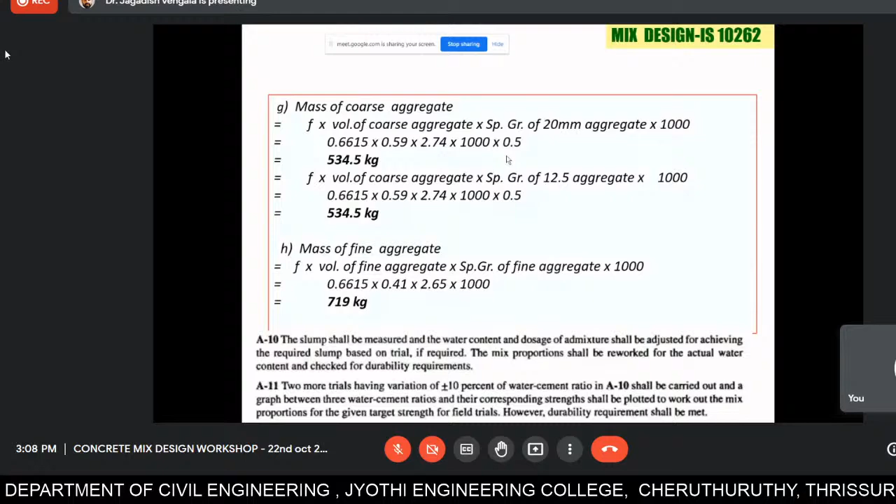0.6615 into 0.59, so 39% is your coarse aggregate, and about 27% is your fine aggregate present in your normal concrete. And your paste is around 34%, and paste is nothing but water and cement.

When you calculate the volume fractions, it is very important to understand the volume fraction of mixes. When you observe all these mixes, the volume of fine aggregate and volume of coarse aggregate is more or less equal, or sometimes fine aggregate is more than coarse aggregate. But in normal cases, volume of coarse aggregate is more compared with fine aggregate for normal concretes, because it has to flow.

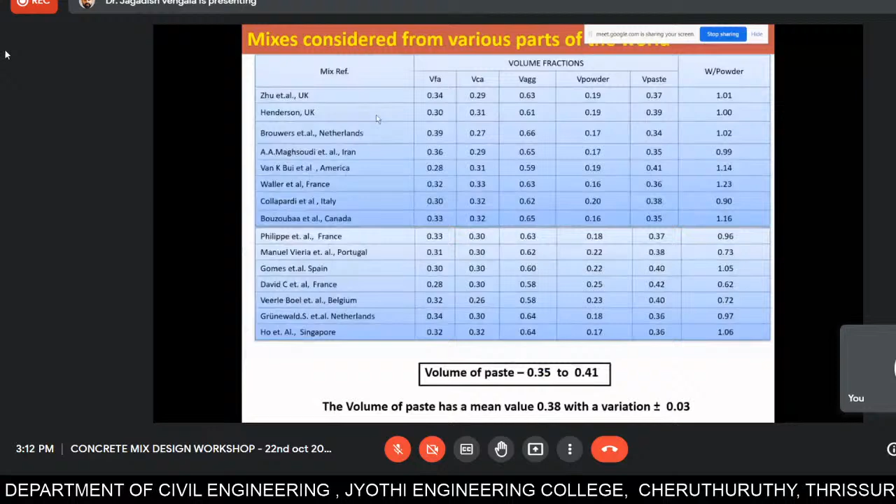Where Indian researchers' volume of paste ranges from 0.37 to 0.46, the mean itself is 0.38, but here the volume of paste is more than in other countries. Why? Because of not having proper aggregates. Any small change in the shape of the aggregates means we need more paste to get the required flow parameters.

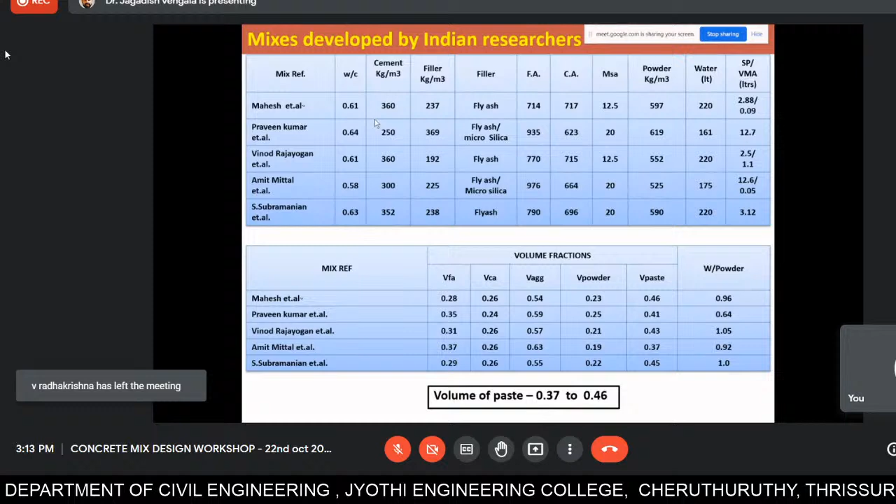So in other parts, when you see these SCC mixes, the mean value is 0.38, and 40% paste volume is required, 60% is aggregate volume, where volume fraction of fine aggregate is equal to or more than coarse aggregate. But for Indian researchers, it is 0.4 to 0.46. Paste volume is higher because of angular crushed aggregates, or sometimes because we avoid using VMA, the viscosity modifying admixture—instead of using viscous admixture, you go for more paste content.

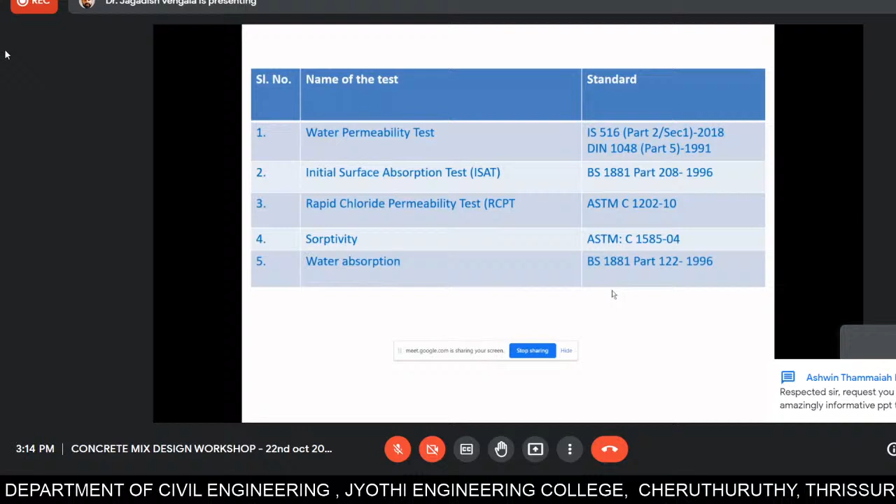Nowadays it is very important to go for special tests. Many people are making it mandatory for special structures. It is becoming common to go for water permeability test. People are asking about initial surface absorption test, RCPT test results, and sorptivity and water absorption tests. I just wanted to give you a glimpse.

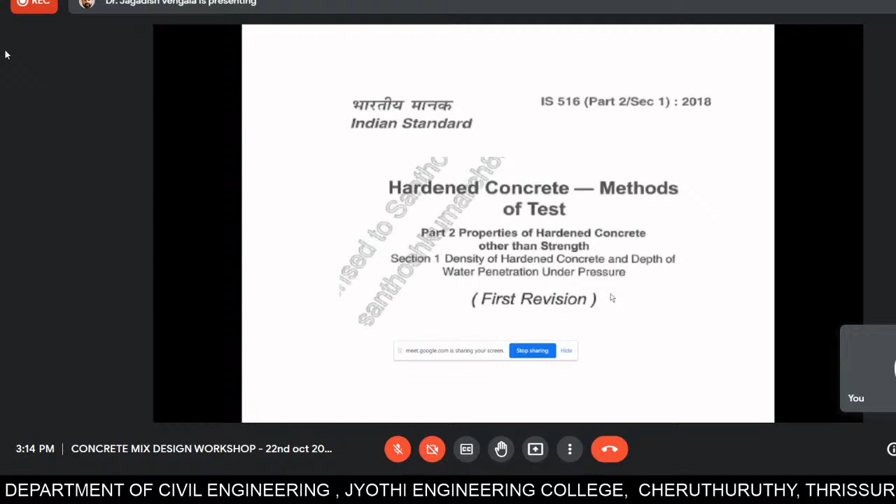This is the depth of water penetration test, IS 516. This is the water permeability test, and this is how you carry it out. You apply the required water pressure on the surface of the concrete, and after the end of the program, you split the cylinder into two and find out the depth of penetration.

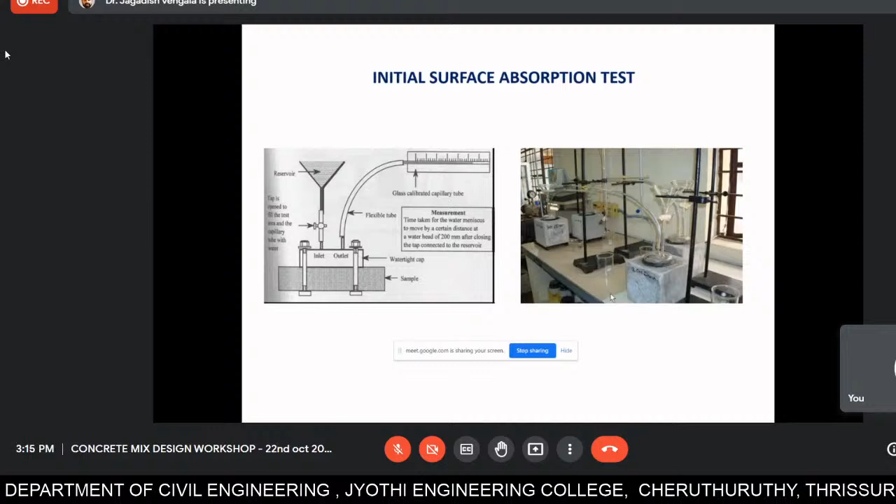Another one is the initial surface absorption test. This is the time taken for the water to move by a certain distance after closing the tap, so they find the initial surface absorption, how much absorption occurs.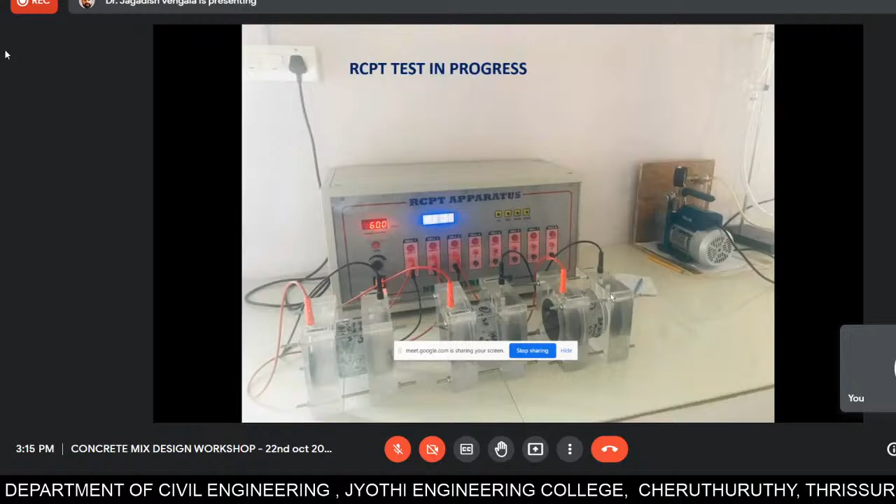This is the RCPT test, how many coulombs of chloride it passes through. The requirements you can see here: if it is more than 4,000 coulombs, the chloride permeability is high; between 2,000 to 4,000, it's moderate; 1,000 to 2,000, low; and less than 100, it is negligible.

Some trials done at Stedrant laboratory, you can see here. These are the mixes, M40 mix with cement and GGBS, and these are the weight proportions. This is the consistency they got for M40, 49.4. This is another mix, M30 grade of concrete, with the required weight proportions and 41. The target mean at 28 days is what they've achieved, using a dosage of admixture of 375.

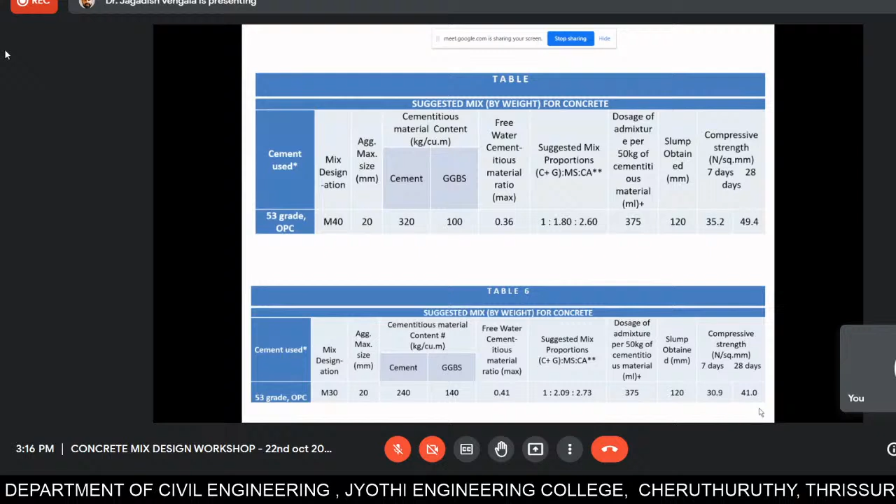So these are some of the other mixes they carried out. This is how they give the test report for typical quantities. Yeah, this is a very interesting durability test.

They've asked for this Amravati site construction in Vijayawada, wherein for water penetration test, they've carried out RCPT, 17-13 coulombs, and initial surface absorption and water absorption.

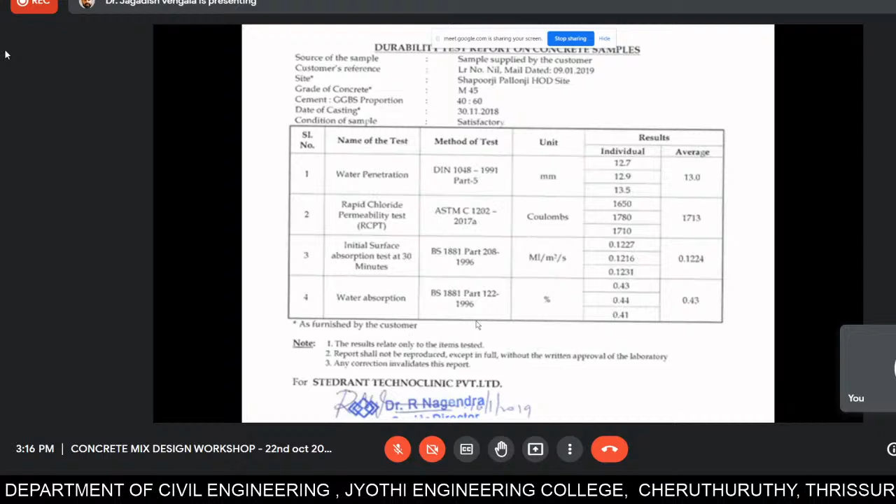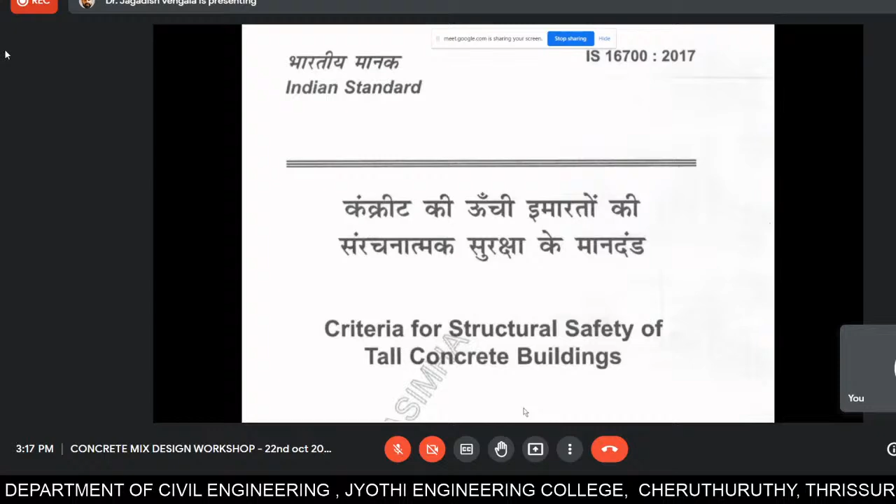Why are these important? Because for structural safety of tall concrete buildings, the criteria mentioned in IS 16700, you can see some of the specifications here, wherein how much strength they require.

And what is the rapid chloride and RCPT values. For foundations, it should not be more than 1000. For superstructure, it should not be more than 1500 coulombs. Water penetration, the maximum depth should be 15 mm. So in the code itself, they are giving the criteria.

Okay. And coming to some of the tests which are related to this.

Yeah, one second. These are some of the non-destructive tests, very important, particularly the rebound hammer and ultrasonic pulse velocity test. I just wanted to give you a glimpse because once you prepare the concrete and put it inside, we have to handle it properly.

If you don't handle it properly, you have to check, because the client will ask what is the strength after placing it. If we have a doubt, then you have to go for various other non-destructive tests.

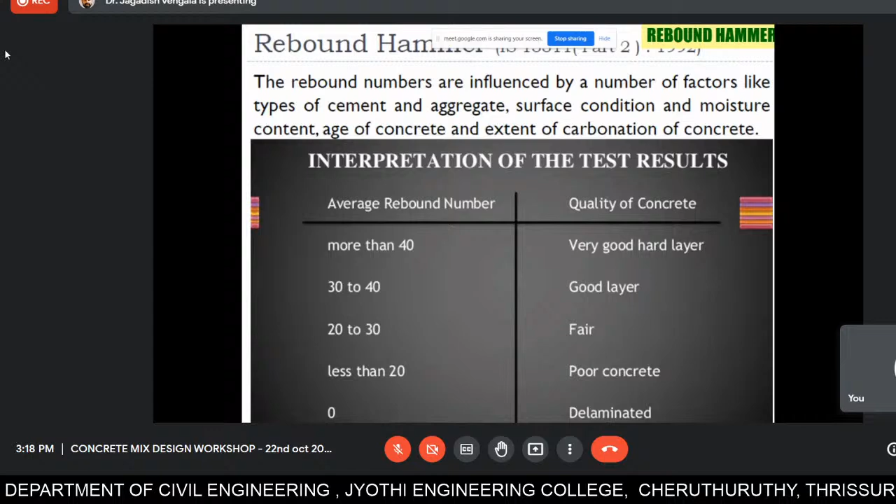This is an ultrasonic pulse velocity test wherein you send the pulse and measure the concrete quality. So how much is the pulse velocity? If it is above 4.5, it is excellent. If it is 3.5 to 4.5, it is good. Below 3, if the velocity is less, then it is doubtful.

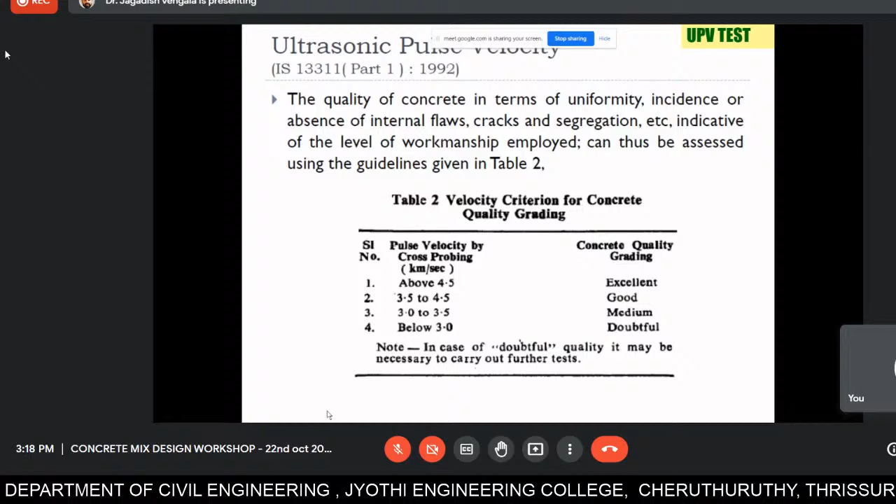Even if you are not satisfied with both the tests, either rebound hammer or pulse velocity, one will go for core cutting and then check the strength of the concrete.

So you cut the core and then you find what is the failure and how much is the strength. This is a typical core.

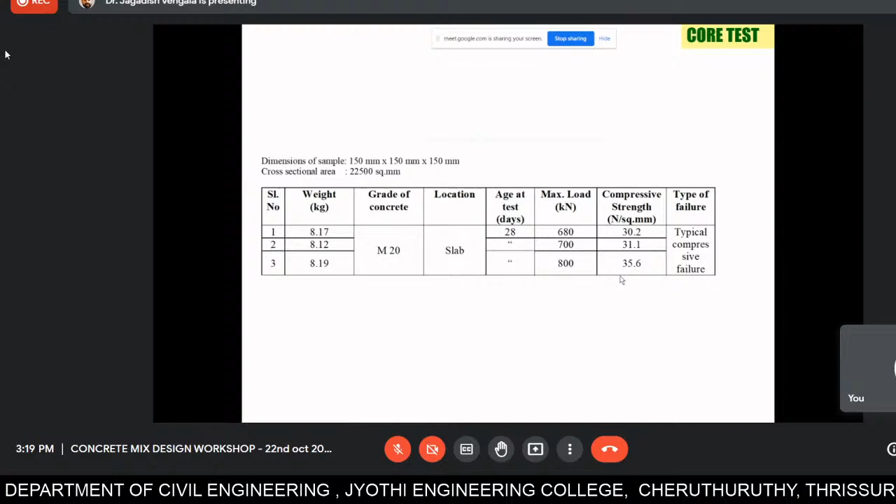So for a durable concrete mix design, you have to follow 7 C's. One is the designer should make sure you provide sufficient cover. You have to reduce or avoid congestion such that the concrete is properly placed, and you should have a sufficient amount of calcium hydroxide to form the CSH gel.

And you have to place sufficient numbers of cover blocks such that you maintain that cover. You have to make a lot of checks before concreting, properly compact, and also properly cure the concrete.

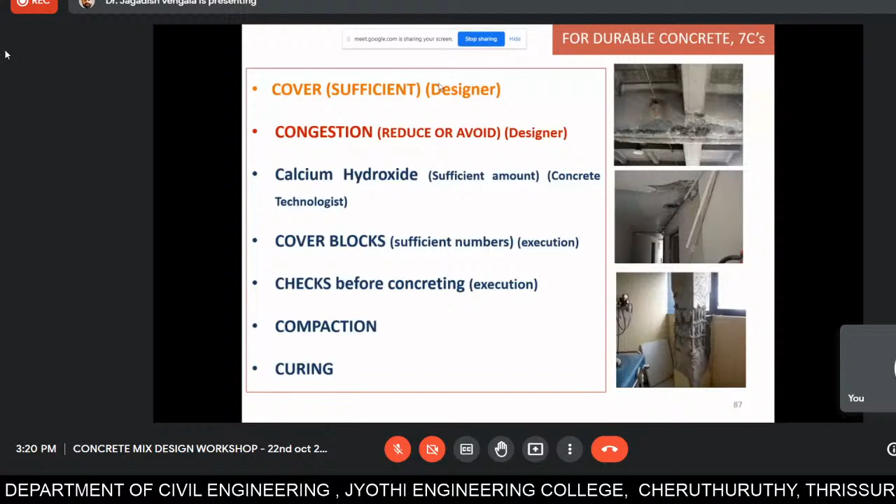Coming to the summary of my presentation: the mix design should fulfill durability requirements. Mainly, exposure condition is very important. And you need to ensure compatibility between various ingredients, particularly chemical admixture and cement.

Very, very important - many times the compatibility between the admixture and the cement is a main problem, whether it causes bleeding or segregation. So you should have proper compatibility between the cement and admixture.

And carbonation and chlorides are a major concern, particularly in Indian conditions. So you have to go for durability tests, particularly when you're going for important structures, particularly in the coastal environment. Durability tests are mandatory.

And use of supplementary cementitious materials like fly ash or GGBS is recommended and should be encouraged to achieve denser concrete. People have doubts on how much fly ash to add, and you need to know the behavior of fly ash compared with GGBS when adding it - whether it affects long-term strength or early strength, you need to understand.

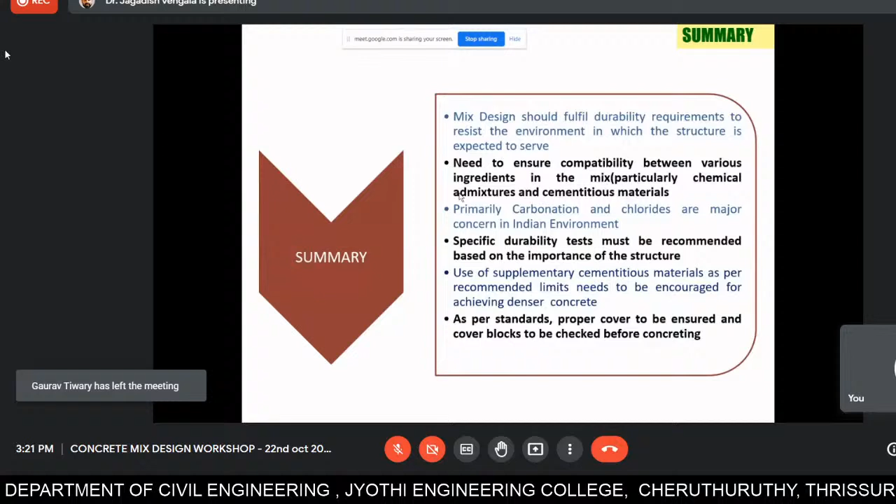And as per standards, one has to maintain proper cover and cover blocks, checked before concreting. So with that, thank you, and the floor is open for questions.